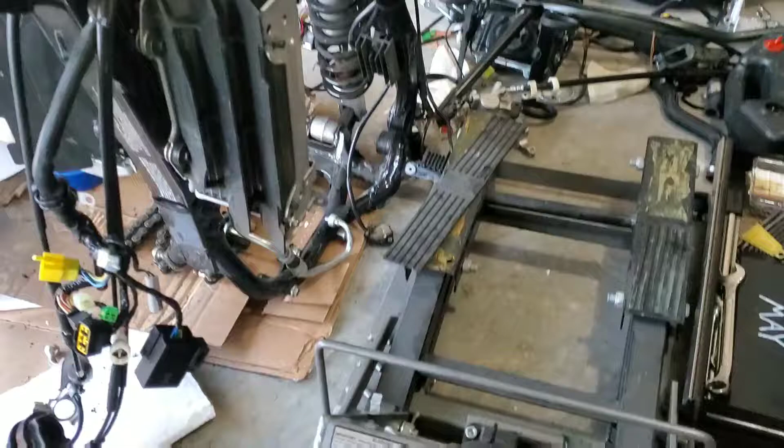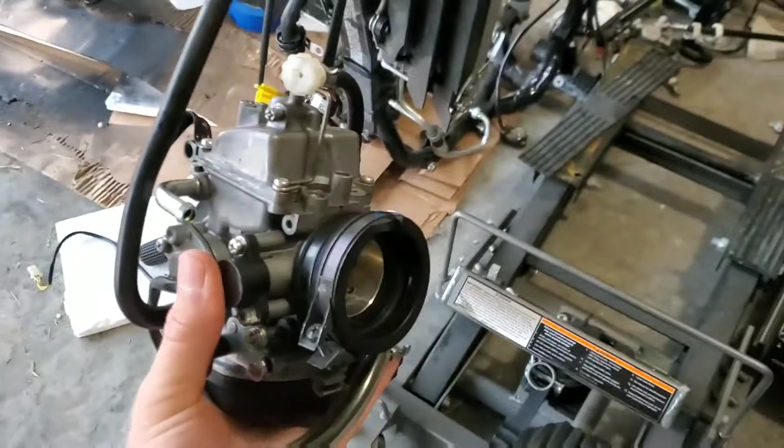Alright guys, Brian here. Here's my DRZ project that I've been working on. Today I'm doing the JD jet kit on the stock carb. I'm going to walk you through the process with me.

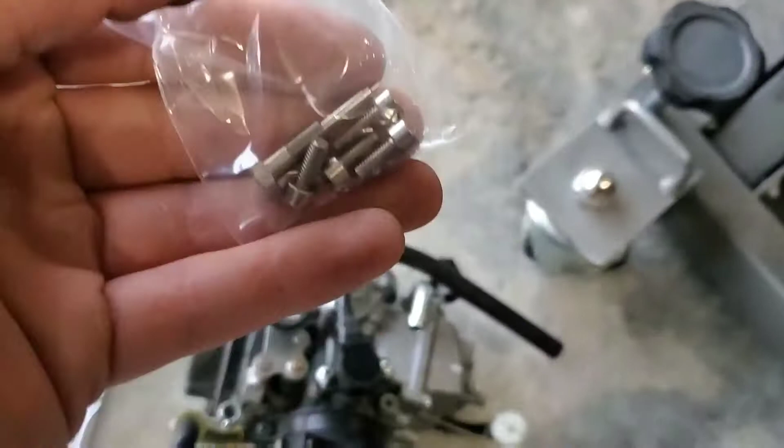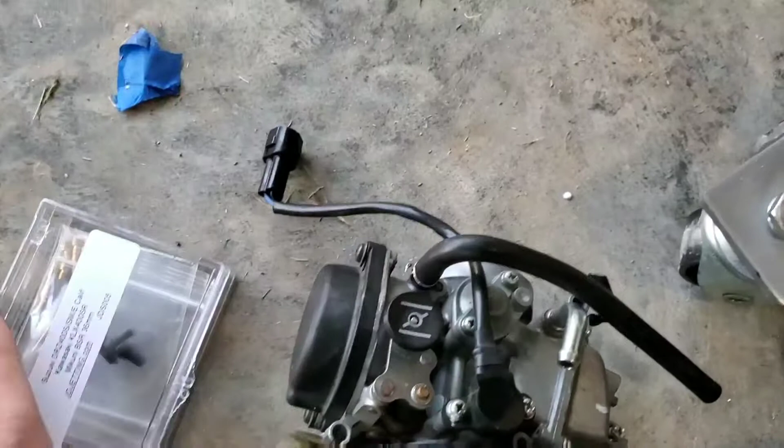So first of all, if you're getting this from Thumper Talk, it has the option to buy the stainless screws and the longer air fuel mixture screw. Don't buy the stainless from Thumper Talk because new screws already come with the JD jet kit. Just a heads up on that. All right, let's get started.

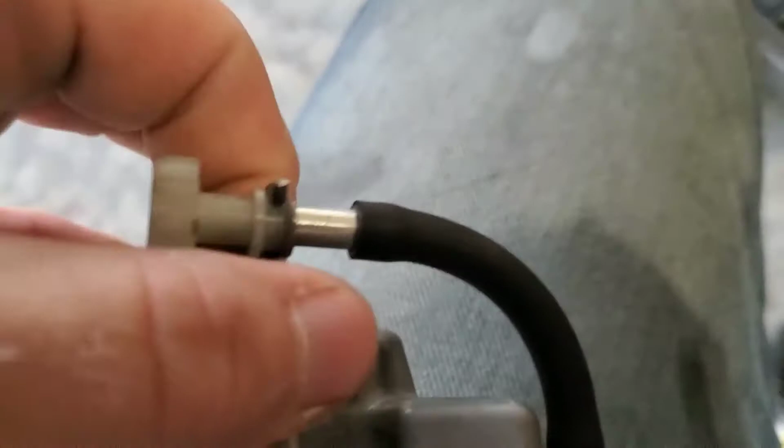The first thing you need to do is remove the idler screw from its clip and then unscrew it from its spot. That's so you can get the float bowl off the bottom here.

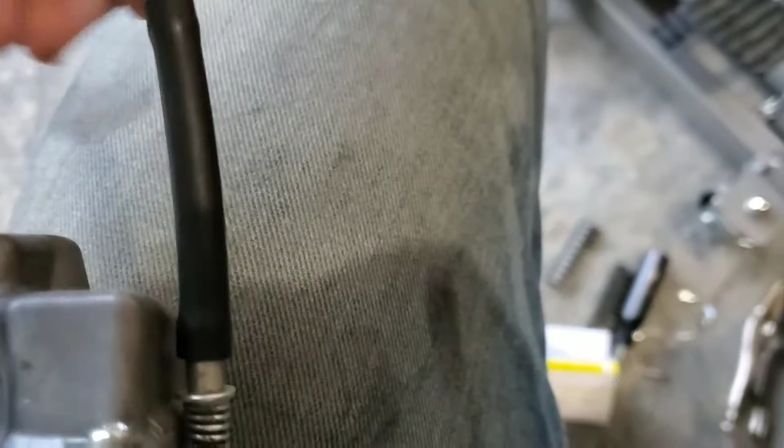Next, you're going to want to do the 4 float bowl screws here, here, here, and here. These are JIS screws, so regular Phillips won't take them out. You can see I got this one undone and this one undone with my screwdriver, but I stripped out these two. So what I did with the stripped out ones is I got a needle nose vice grip and got it on there nice and tight, and it broke them free just fine.

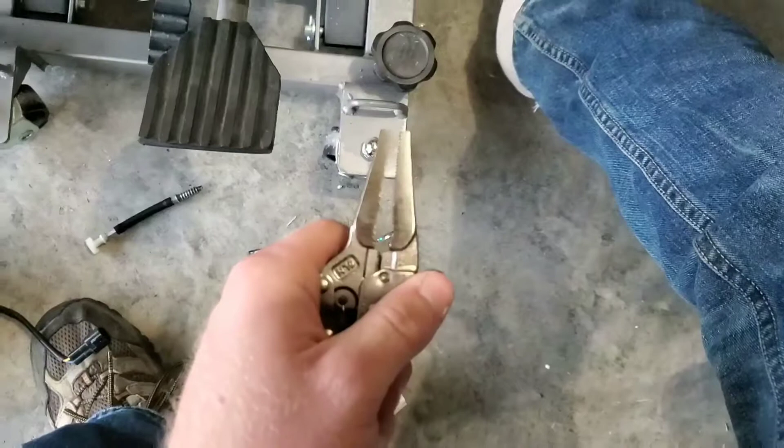And you got those replacement screws already, so you don't need to worry about damaging those. If you have issues and don't want to buy a JIS screw bit, a vice grip is the way to go. I'd recommend getting the JIS anyways, I have some in the mail actually, they just didn't get here in time. But there's a lot of other spots on the engine and on this bike where JIS would come in handy. So if you're going to be doing a DIY project like this, you might as well just bite the bullet and get them, it's worth it. They're like $4, and then you don't strip out your screws, like if you're doing a Kickstarter install or something like that, I know there's 2 JIS screws for those. So anyways, I'll get that off and update you.

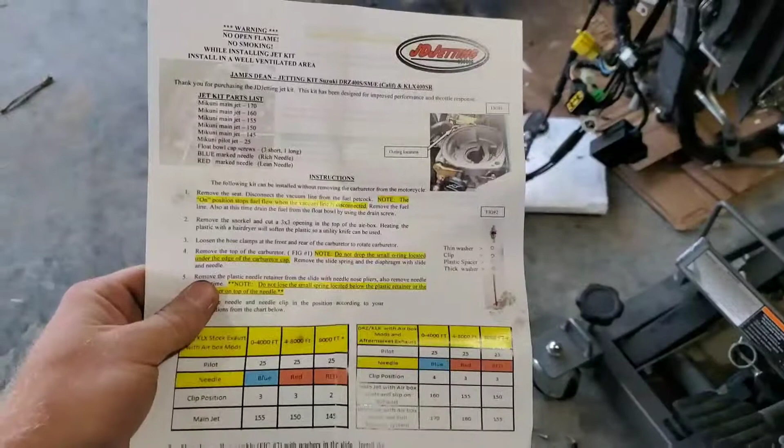Alright, so here's the sheet that comes with the JD jet kit. Comes with all the information you need. I'm going to be getting an MRD exhaust and doing the airbox mod on this when I put it back together, so it gives you right here, this is DRZ with airbox mods and aftermarket exhausts.

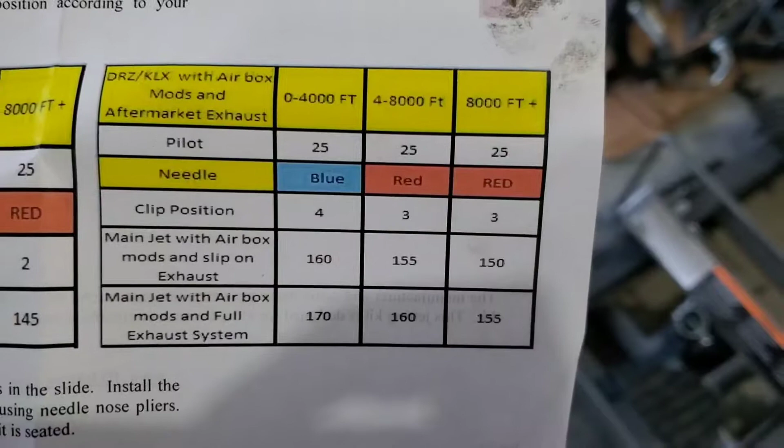So go ahead and pause your screen here, and it tells you exactly what you want. Then you just got to fine tune it after that. And then here's what you got if it's stock. So I'll be going with the clip position 4, main jet 160. Yeah, I'll try 160 first, and then go up from there if I need to. And then pilot jet at 25 is what I'll be going with, so I guess they're all 25.

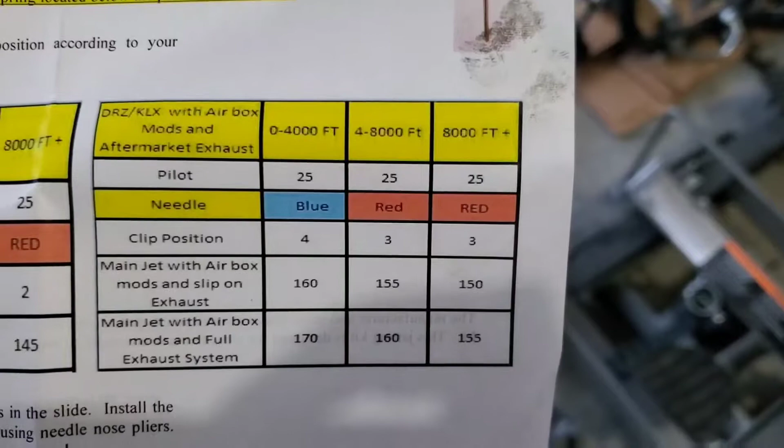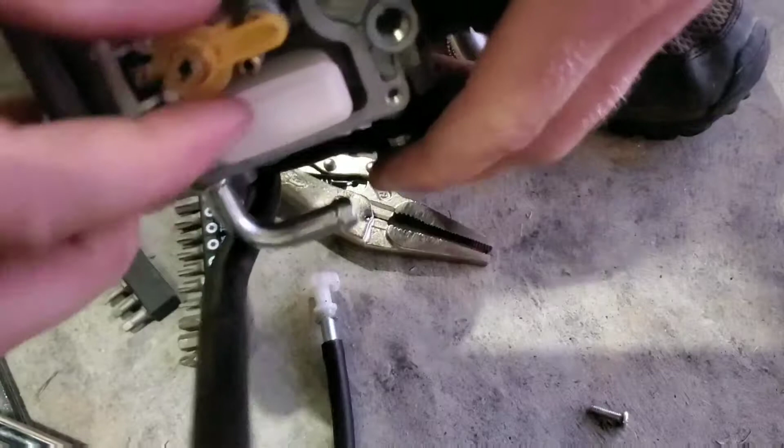All right, back to it. To remove the main jet, you're gonna take this plastic clip off, nothing holding it on, just slides right off like that. And then you're gonna slide an 8mm wrench over the retainer.

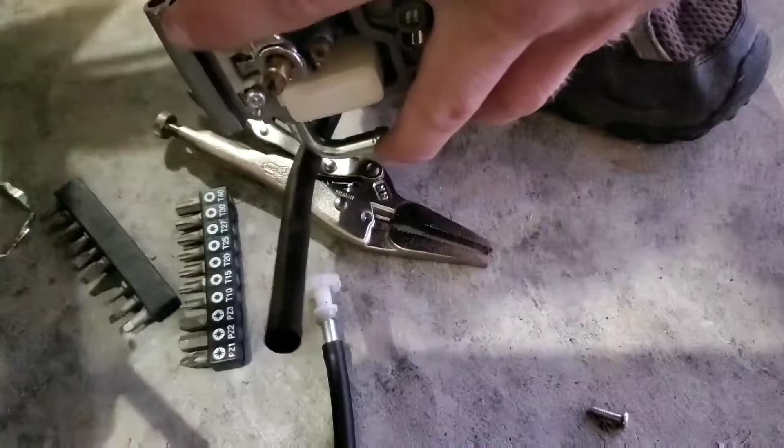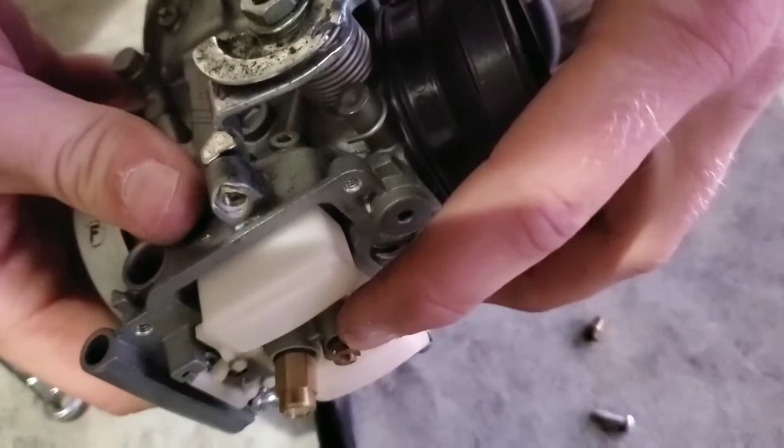Get you a flat tip like that, just slide it on the jet and twist it off while holding that wrench, and then unscrew it, and that's it, that main jet is out. And if you're wondering, this is the starter jet, you're not replacing that at all, nothing changes on that, just the main jet and the pilot jet.

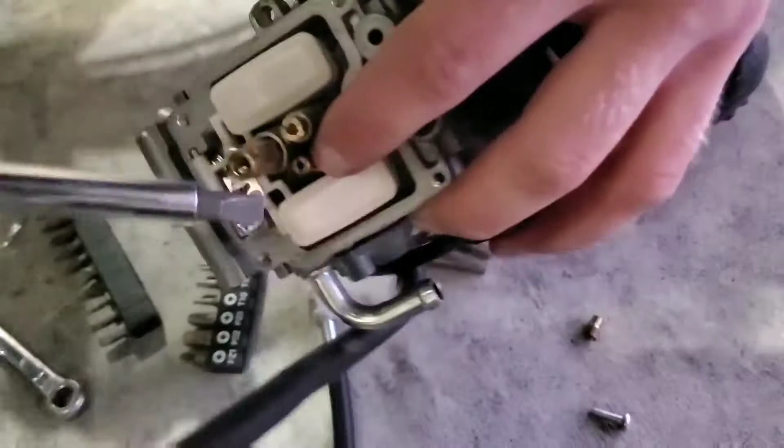And all you need to do for the pilot jet is just get you your flat tip, get it on there, and unscrew it.

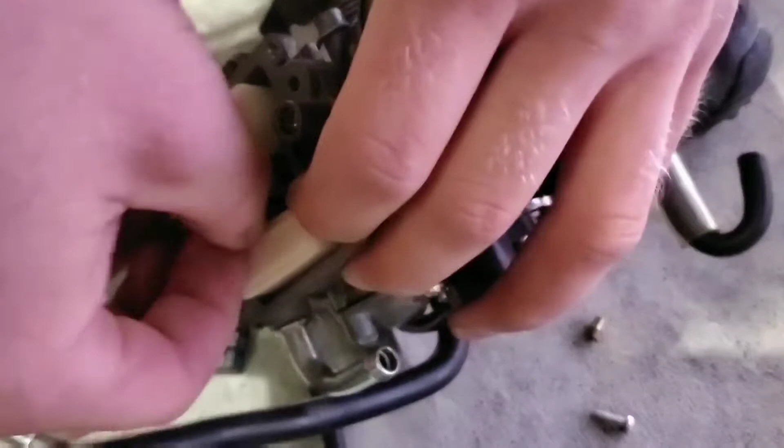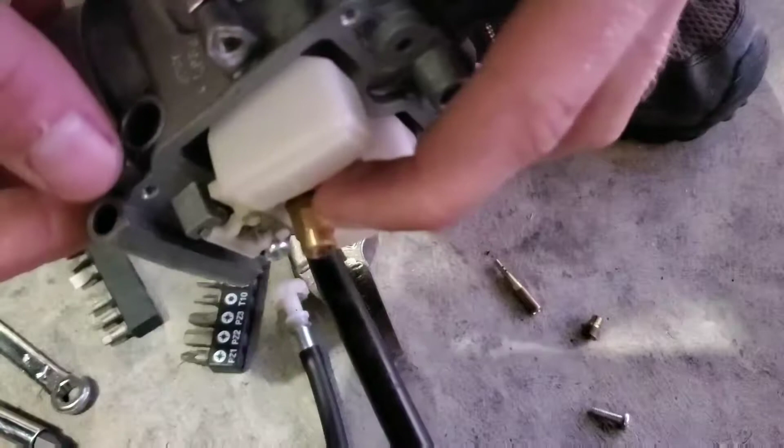And the pilot jet's out, just like that. Too easy. Remember, you don't need to take this off, you don't need to loosen that at all. Get your 8mm wrench, hold it, and you don't need to mess with that at all.

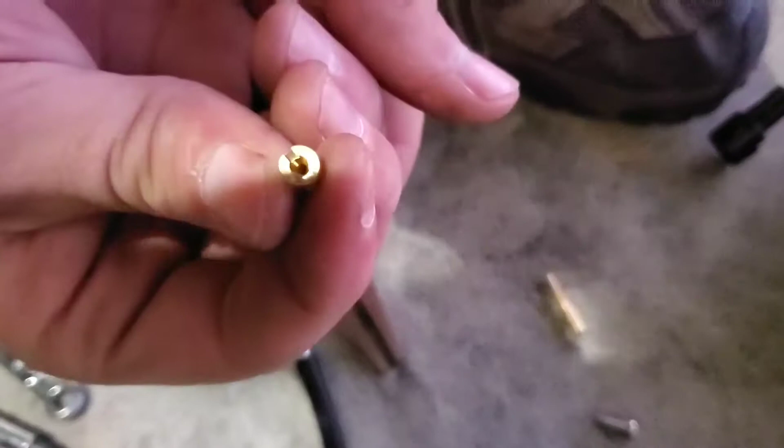So like I said earlier, there's actually only one pilot jet that comes with this kit, and that's the 25, so you don't need to try very hard to find that one. But there are 1, 2, 3, 4, 5 main jets, so make sure you grab the right one. I'm going with the 160 first, the smaller one. I don't know if you can read that, but it recommends 160 or 170.

When I rejetted my Honda Shadow, I found I had better luck starting at the lowest and working my way up, tuning it, and then working my way up to the highest one that worked after that.

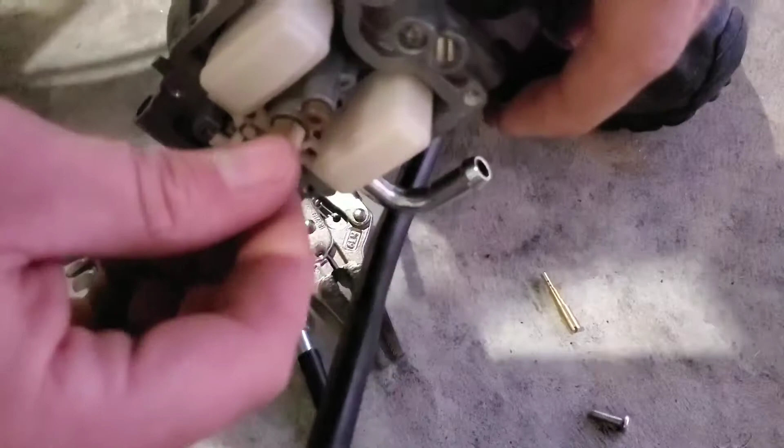So to put the main jet in, just screw it into that retainer, grab your 8mm again just to hold it, your flat tip, and tighten it down just to snug. It's brass, you will strip this out pretty easy, so just snug, and that's it. Main jet's in, that's all you gotta do.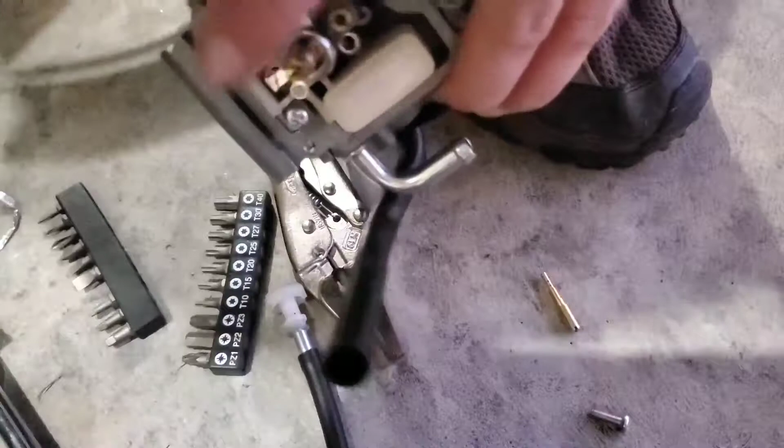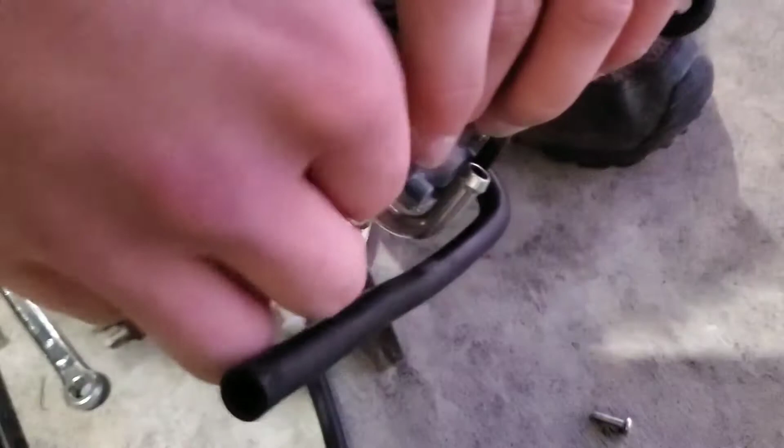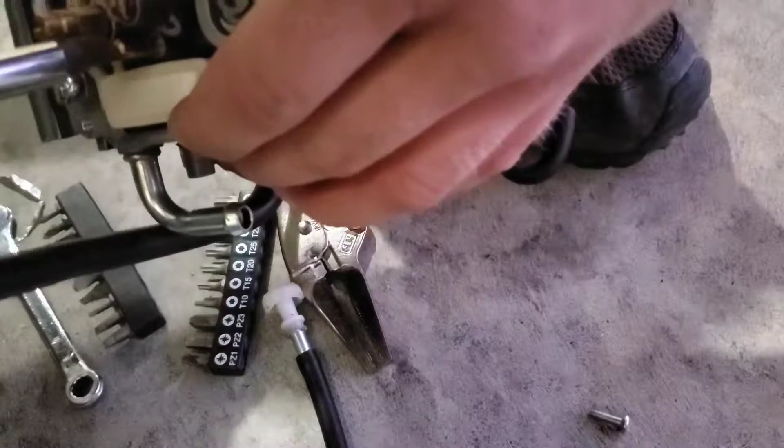And then take your pilot jet, stick it down that hole, and screw it in. Not to insult your intelligence, but you always start your screws or anything that screws in by hand, just so you don't strip it out or cross-thread it. Just grab your screwdriver, same thing, pilot jet's brass, you don't want to strip these out or anything like that. And it doesn't need to be insanely tight, you don't need to hulk it or anything, so just snug.

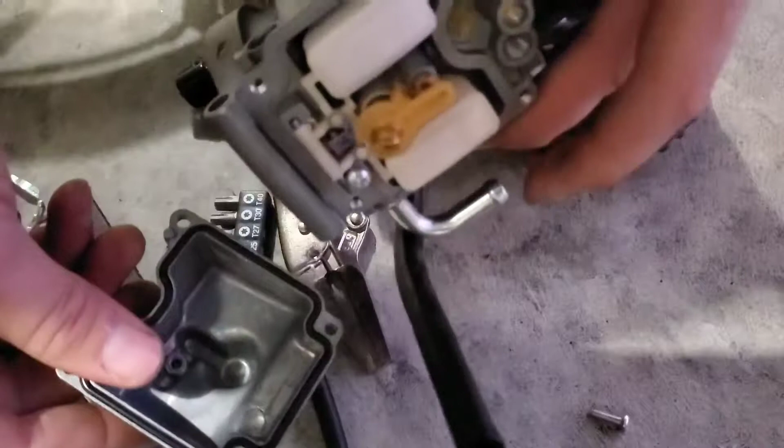And you're done. Slide your plastic clip back on, and put your bowl on, replace the new screws, and that's it for the bottom end. Then we'll move up to the top end. I'll give you an update when it's all put back together.

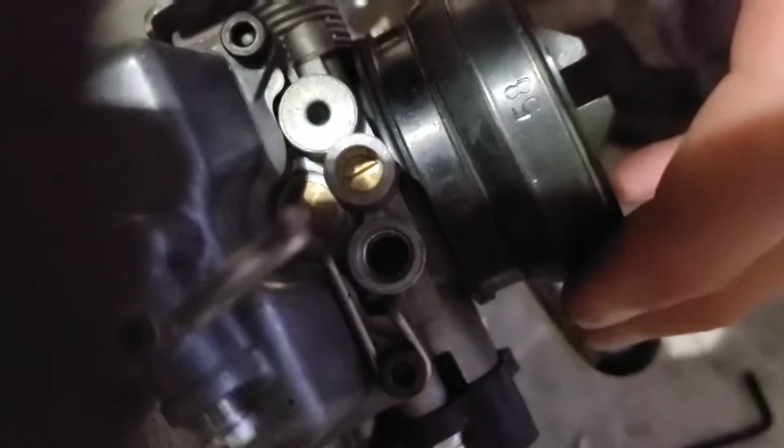Alright guys, so the float bowl is back on, wire clamp and idler screw clamp are back on where they go. Something I didn't mention earlier is this right here is your air fuel mixture screw. There's going to be a brass plug that looks like the one down in here. All you need to get that off - this is off a 2017, so they have holes started in those brass plugs, and brass is real soft. So really all you need is, you don't even need to drill the plug out. You can literally screw a wood screw in, like I did, and pull it out - just some random old wood screw, because it's already got the hole started. And then once you get the plug out, that's your screw.

So that's worth noting. Now the float bowl's back on. All that's left to do on the bottom here is to screw in my idler screw and clip it back into the clip. And that's all for the bottom end.

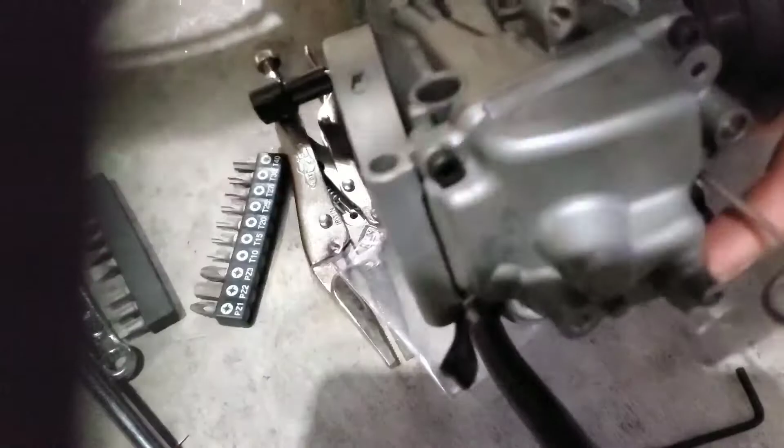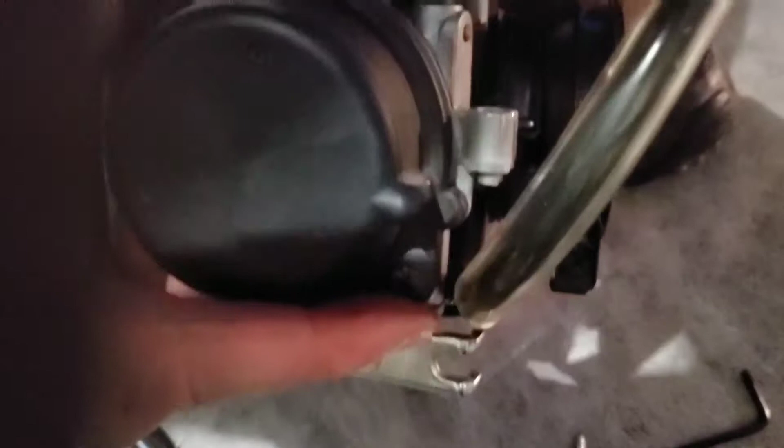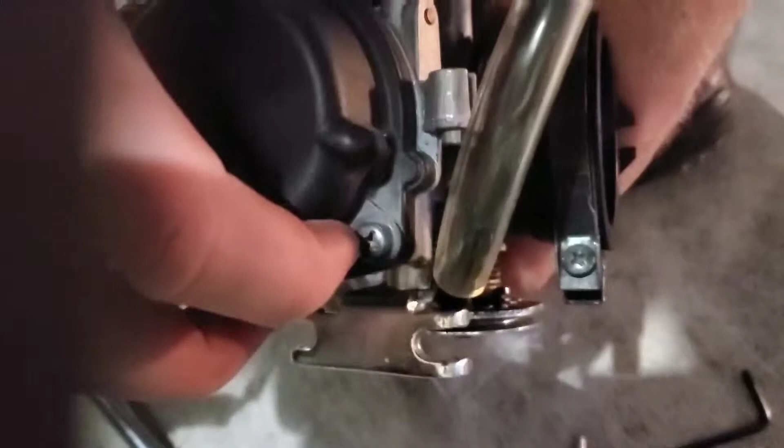Alright guys, now for the top of the carburetor, it's just 2 screws right here and right here. Something to note when you're taking this off is there's a little O-ring right in here. So here's the choke, here's the throttle cable connections right here, and right here this corner has got a little O-ring. So when you take this off, be careful you don't lose that, because if you lose that, your bike ain't gonna work. So keep that in mind when you're taking these off. I'll get this off and get back to you guys.

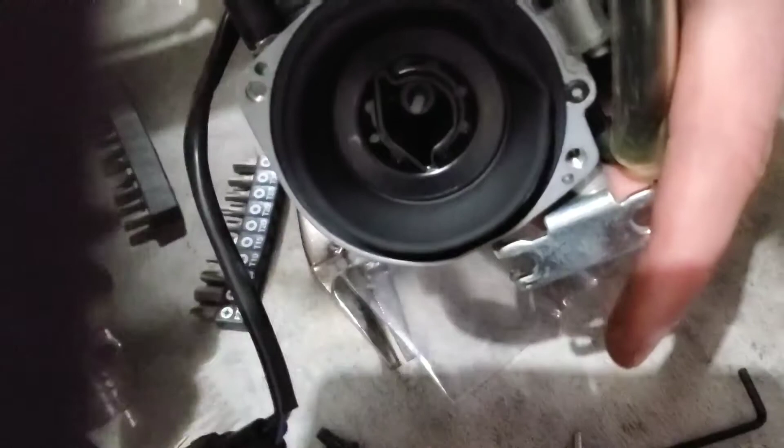Alrighty, so the screws are out, so you're gonna take this cap off. Spring will come with it, or not - take the cap off, take the spring out. And then here's that little O-ring I was talking about that you don't want to lose, so make sure you're not losing that. And then all that's left is pull the diaphragm out. Careful not to tear it, it's pretty soft.

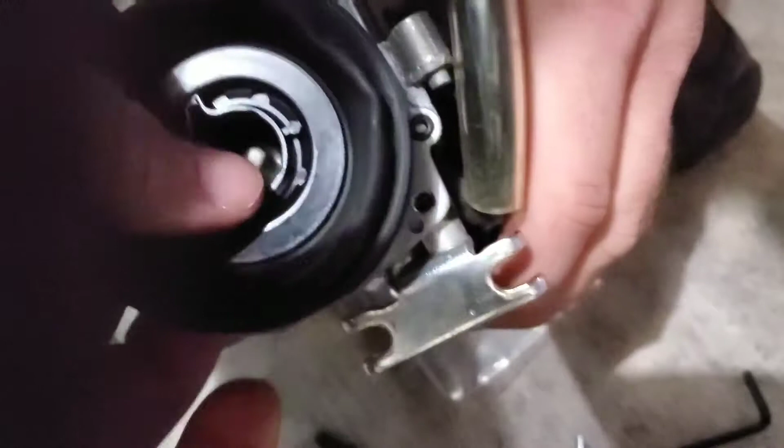And there you go, now you're done with the carburetor for now. Set it aside in a manner where you don't tip it over and lose that.

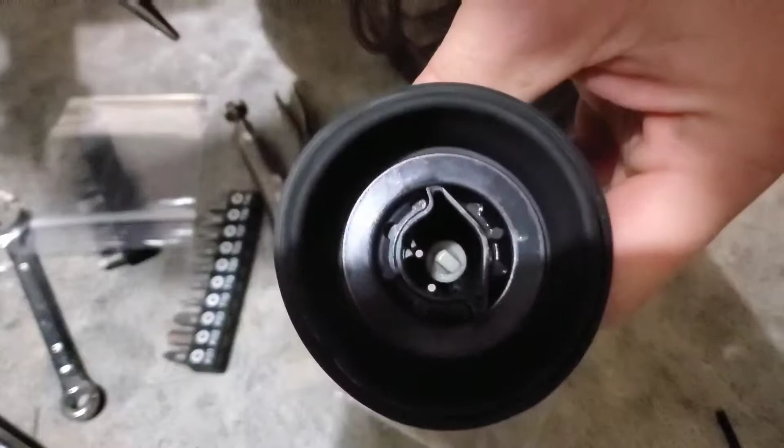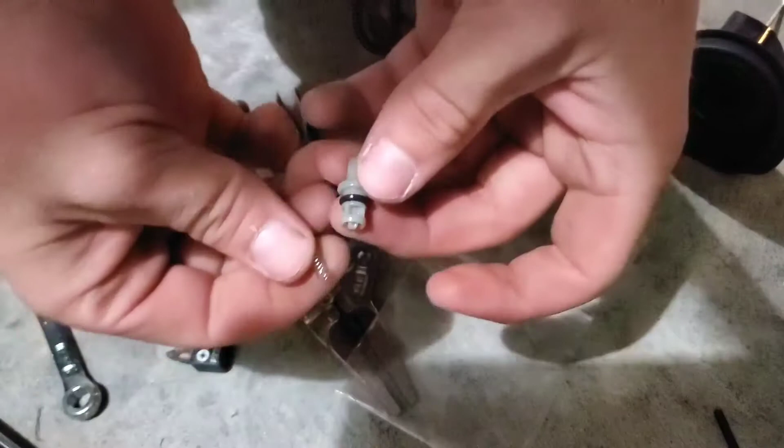Alright guys, I got the diaphragm out, you can see down in there. So to get the needle out, there's that white retainer up there. You just take needle nose pliers, get in there. Don't pull too hard because there's a spring in there you don't want to lose. Yep, there we go, here's the retainer. And then, I told you not to pull too hard, I pulled too hard, there's the spring, you don't want to lose that. It goes right in the retainer like that, and it sits on top of the needle. Okay, so with that out...

Take the needle out. There's a bunch of loose stuff on the stock needle, like spacers and stuff. When you're taking it out, I pushed from the bottom and just put my thumb over the top, because you need those stock washers still off of this needle. So go ahead and slide the thick washer, thin washer, right there, and this spacer maybe.

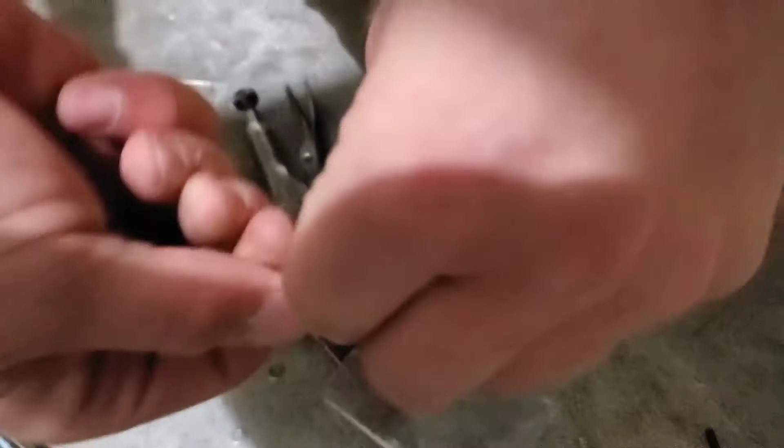Alright, so I got the thick washer and the thin washer off, sorry about that. On the stock needle, there was a clip on top of this plastic washer that was just kicking my ass, so I couldn't get it off. Once the clip is off, the washer should just come off. It's on there, let me tell you. Give me one second here guys, I got cold fingers, I can't get that thing off.

Alright guys, so I got the plastic clip off. Took a little work, that thing was on that old spring, but just took a little force, that's all. So with the new parts, I chose the blue one - there's a red that came with the kit also, but as you saw from the diagram earlier, the blue is what they recommend. And then clip 4 - you can see I got that. There's 5 positions, I got that on the 4th.

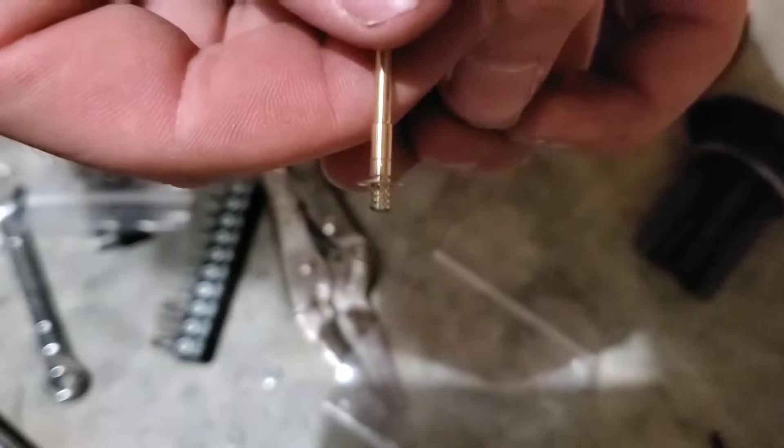So you're just gonna slide the plastic one on, and then the thick one on the bottom as well. And the thin one is gonna go on top, if I can pick that up. Damn. There we go, and the thin one goes on top of the clip, just like that.

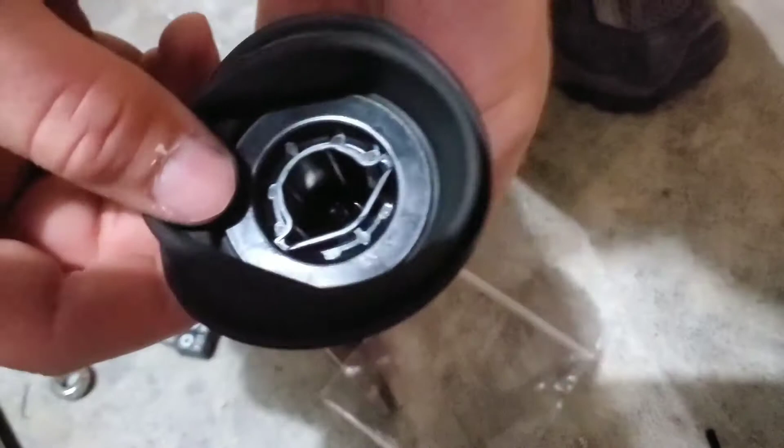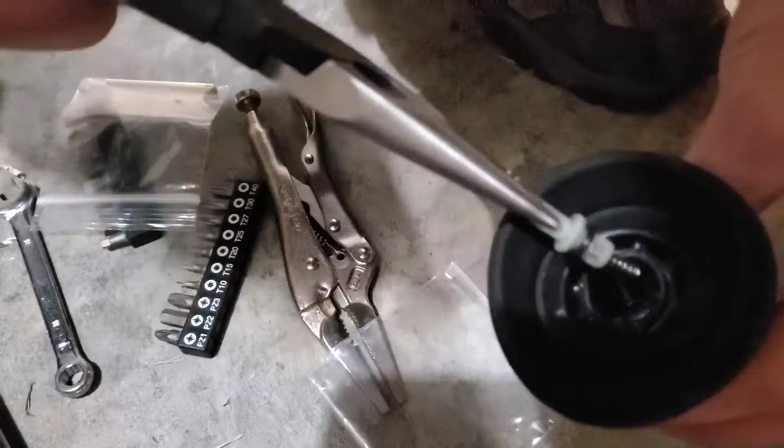Okay, and then it goes in that retainer you pulled out earlier. Make sure the spring's on there, O-ring, make sure you didn't pick up any gunk from the ground. Clean. Alright, and I'm gonna grab my needle nose, get them on there. And slide it over top. And push until you - I don't know if you guys can hear that click - but push until you hear the click, and it's in. So you're gonna take it.

Diaphragm looks good, just give it a quick inspection. And it can only go in the carburetor one way, so you can see that there. So just slide it in. Needle goes in the hole, and boom, just like that. It's in.

Put the spring down in there, put the cap on. There's only one way it can go on because of that O-ring. And put your screws in, and that's it.

Alright, two more things. I replaced that fuel mixture screw. It's pretty straightforward, so there's no reason to really videotape it, but to put it in, you can see I marked it there. It's all the way in till it's bottomed out, and then you back it out 2 full turns, which is why I marked it so you can keep track of how many turns you went out.